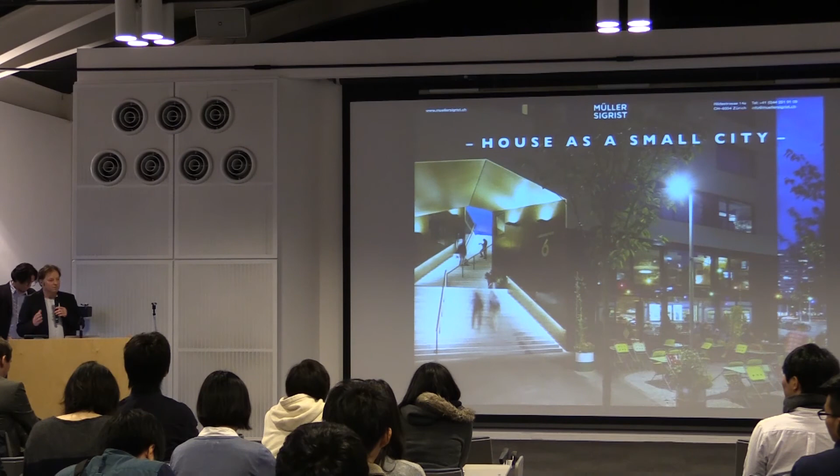Thank you very much for giving us the opportunity to present our work here in Kyoto. It's a bit special for us. I founded the office in 2001. I worked for Sigrist 3 years, and my partner, from ETH Zürich, worked at Herzog & de Meuron, and was also assistant for Kazuyo Sejima at ETH Zurich. Samuel Thoma joined the office from the beginning and became partner in 2006. It's kind of special because Peter Sigrist died last year, so we changed our office a bit, and this is also our first lecture together, me and Samuel, so it's also a test for us.

We would like to emphasize our built work to reflect our philosophy in the office, because we don't make architecture for architects. We think it's important that it's for the society. We reflect what it brings to the user. A building is not only for sleeping or working, it's also a gift to society, a reflection about people who use it or see it. This is not only for the architect or the critic, it's also about people who live in the city.

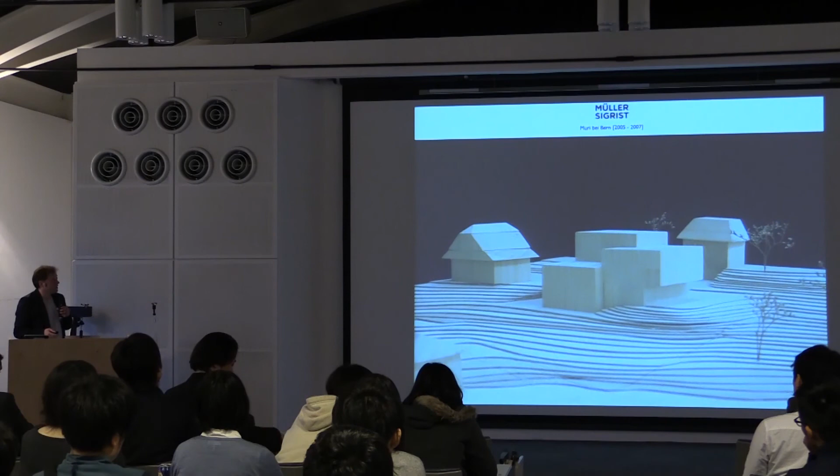First, a house for a private client in Switzerland, in Muri near Bern. A house which lies on a small slope, a compact house which turns in all directions. It's on a hillside, and it provides at the top a magnificent view. This is the entrance, the north entrance, so it's quite close.

The aim was to reinterpret villas from the 19th century, the town villas, providing a moderate higher density than the small single housing units in the neighborhood. The house includes an additional semi-detached apartment with 2 bedrooms. The main unit has 7 bedrooms.

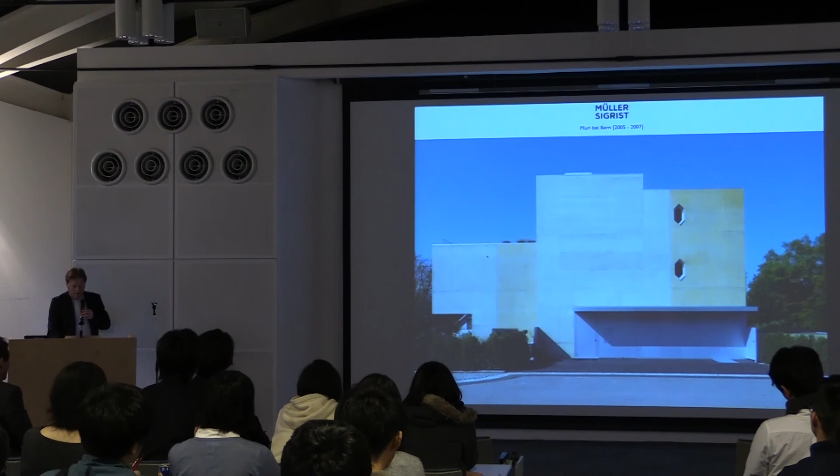Here the idea was also that as a house as a small city, it was about the way we designed how you walk through the whole house, inspired by a master of his time, Victor Horta. Even in very narrow spaces he achieved an interesting way of winding up, going up to the levels by accessing with staircases.

See also here in section, maybe it's a bit pale, but we tried to put in the middle of the house a vertical access to all the bedrooms.

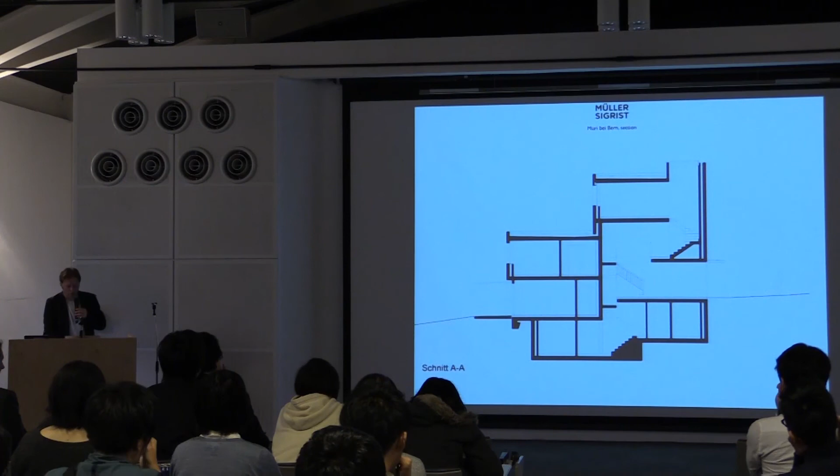Then the rooftop, second floor, where you can access the attic roof terrace.

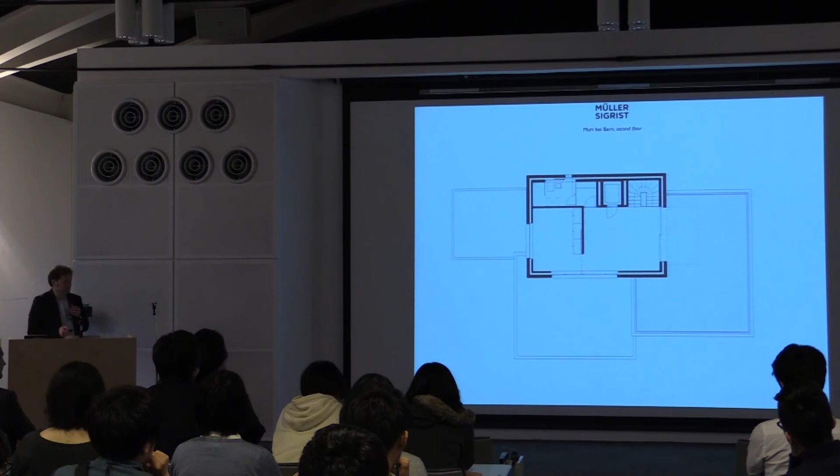Starting at the second floor, you also see a very simple design - the floor and the staircase are made in oak wood, and all the walls are white with plaster.

Then winding to the top, you walk around the house, go up towards the light, and finally reach the terrace.

There is also a covered sitting place on the ground floor. The facade is concrete, with insulation on the inside since we have to insulate our houses very much in Switzerland. The concrete was finished with a kind of paint, a pigmented lasur in two colors, so it wasn't just a solid block but had more attitude, bringing diversity into the concrete facade.

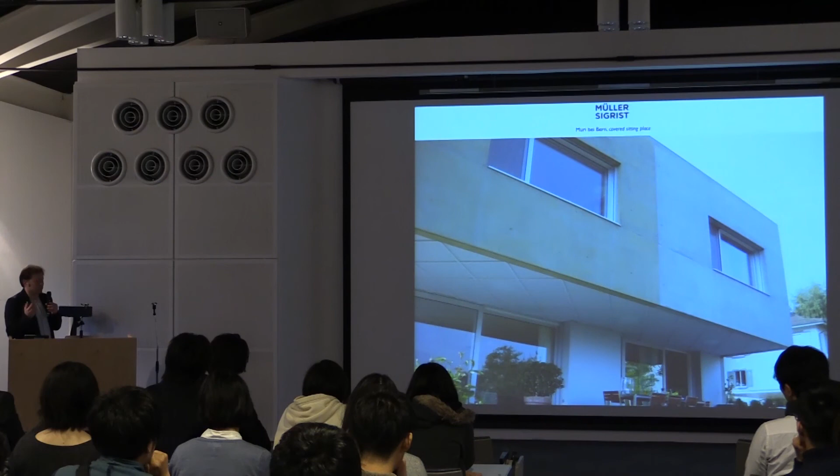Another point is the city as hybrid, which we've been fascinated with since our studies at the ETH. We worked on how to bring together different functions and uses in one building, not like this image here, which is a built prototype planned in the 40s. The idea is not to have separate forms or functions stuck to each other, but to bring them into a new unity, so something new emerges.

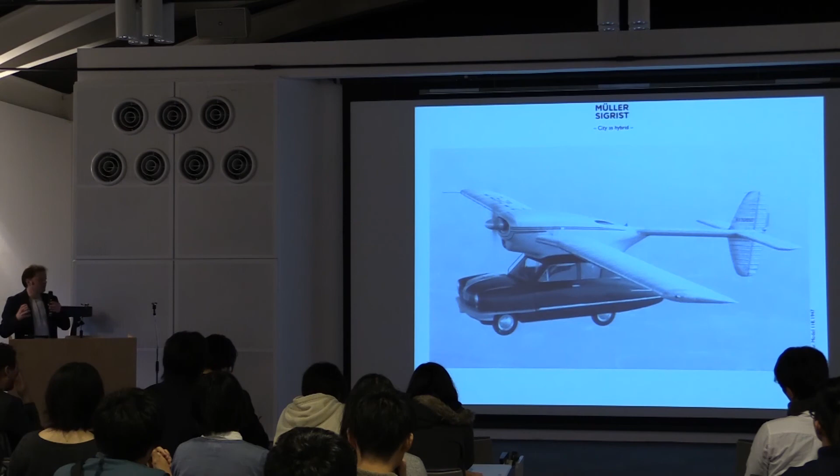We started this in a competition for Winterthur, which we didn't win. You see here all the studies of how we tried to achieve a big complex with shopping mall, hotel, and housing, and how we could bring this together so it starts to get a new form that brings a new unity.

Here's also a nice example, an old topic already almost 90 or 100 years ago. Henri Sauvage in Paris, maybe you know this, where all the different functions are really melted together, with the swimming pool almost on the ground floor, and then the dwellings going up above.

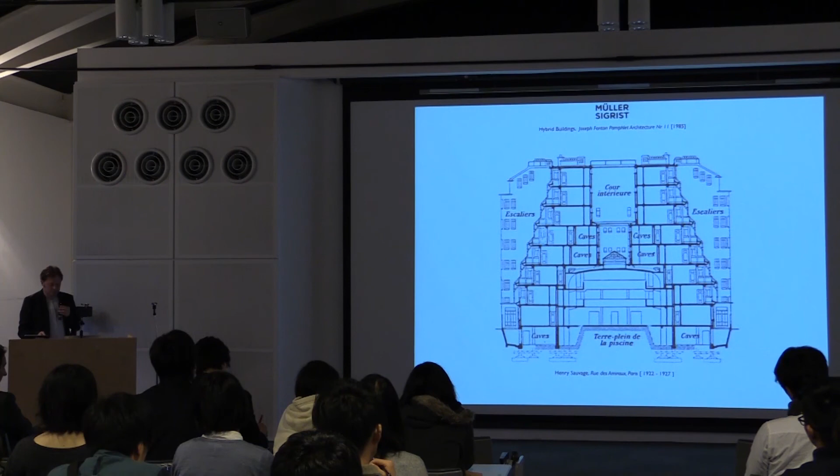So we have some types now which are under construction, or which we won, that follow this kind of typology or thinking, how to bring different uses together into a new form.

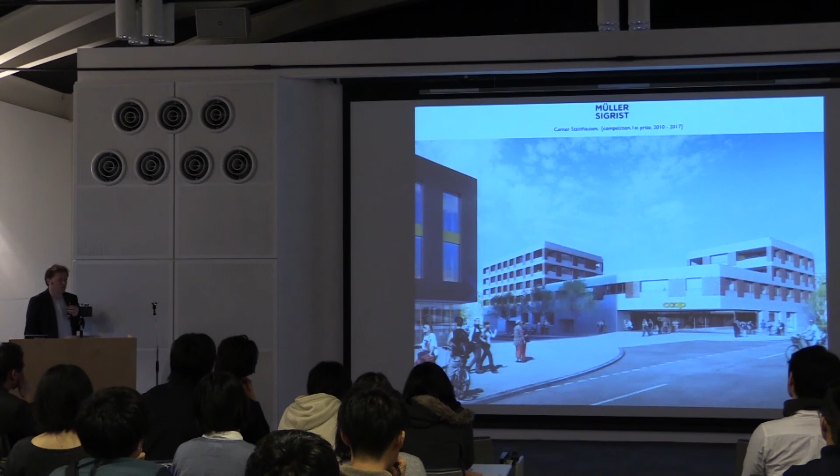Here, a shopping mall, a commercial center, which on top has 30 apartments for elderly people, and on the left side, also integrated, is the function hall and a public library, for a small village near Zurich, about half an hour outside the city.

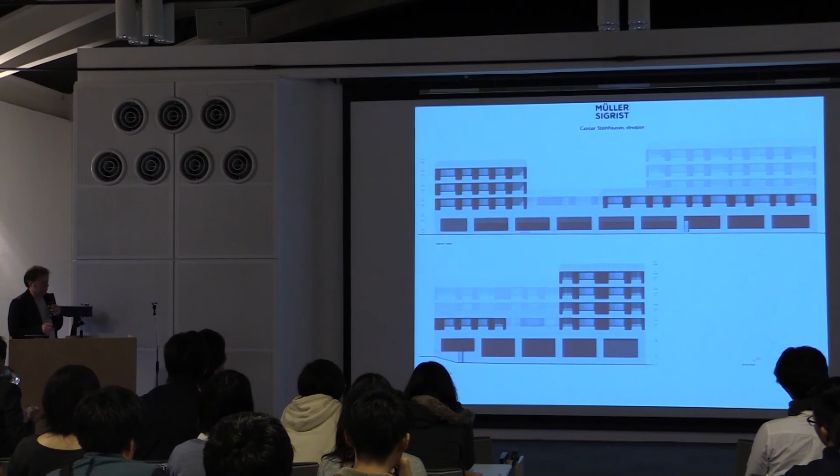The facade is planned as a combination of prefabricated concrete and bricks in between, so that it gets this unity and solidity.

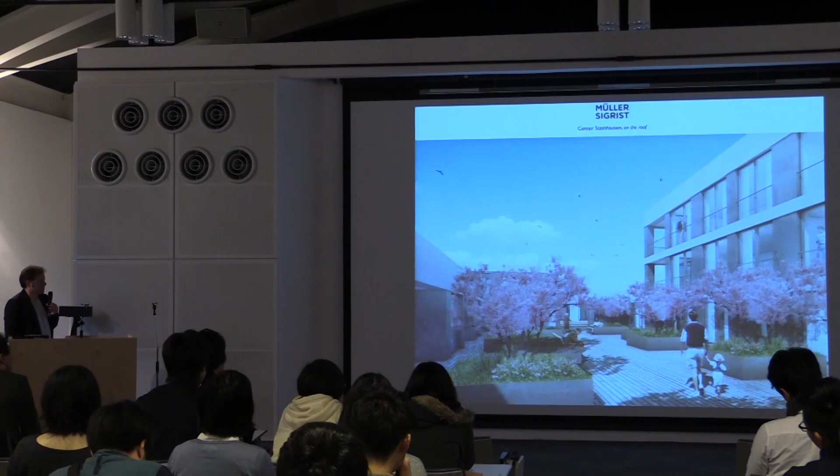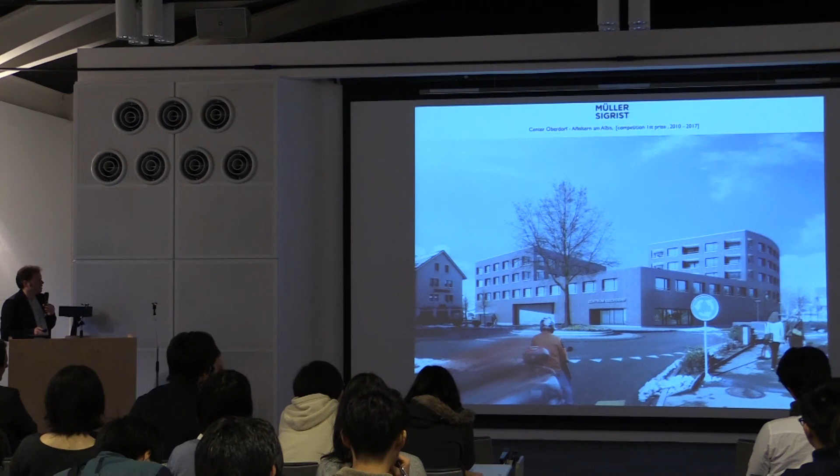Another type I'll show shortly is another commercial center with offices and 32 apartments on top, which follows the same typology. You see the unity develop as it goes up with the dwellings.

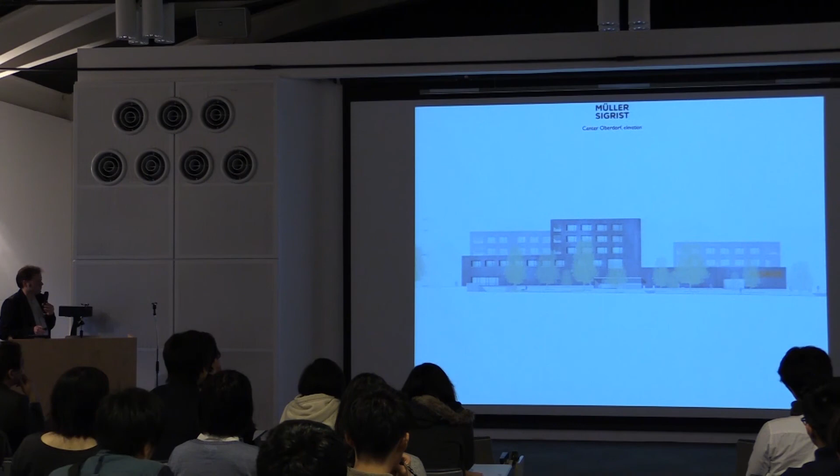So also here the facade was planned in brick, and construction is starting in 2 or 3 months.

Here we also had the task of bringing together an old commercial center on the left side with a new one on the right side. In this competition, we made a kind of covered mall passage, connecting them with a new steel structure roof, shown here in a visualization—though unfortunately we didn't win. All our projects come from competitions.

We never have direct clients or clients who give us direct tasks; it's really always by competition. And this one here, the extension with the new roof, we didn't win because the client said it was too nice, it would distract people from shopping.

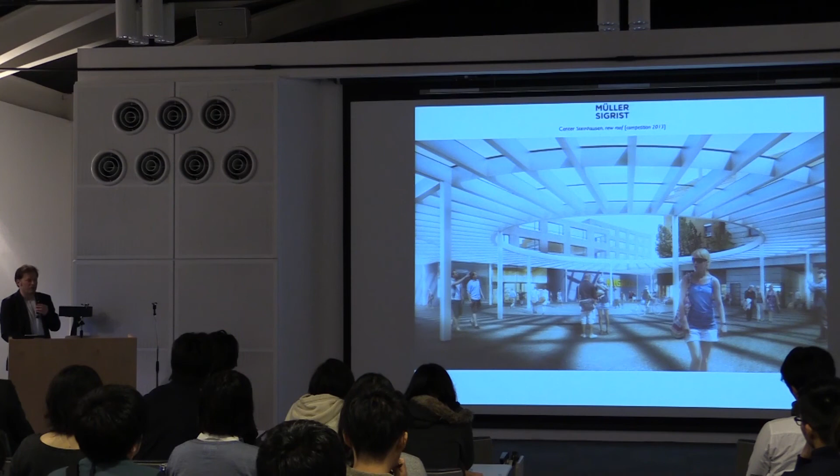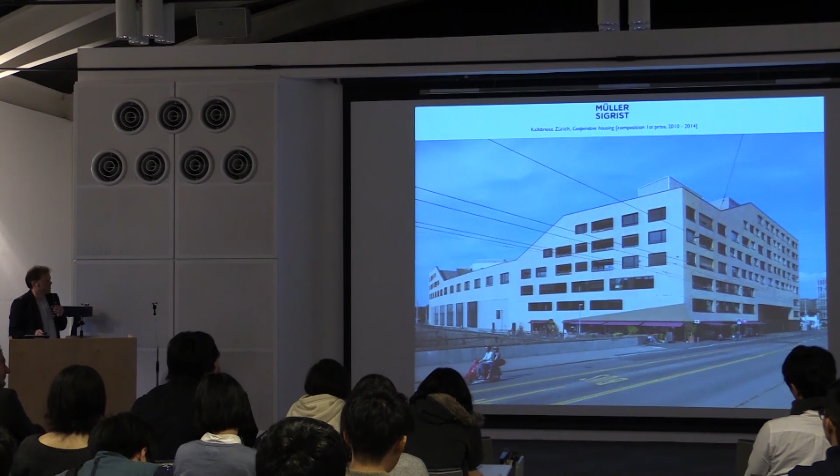This then is the bigger house, the Kalkbreite in Zurich, which was just finished - also a competition which we won. It was a public, open competition with over 150 architecture offices wanting to join, and then 60 or 70 handed in.

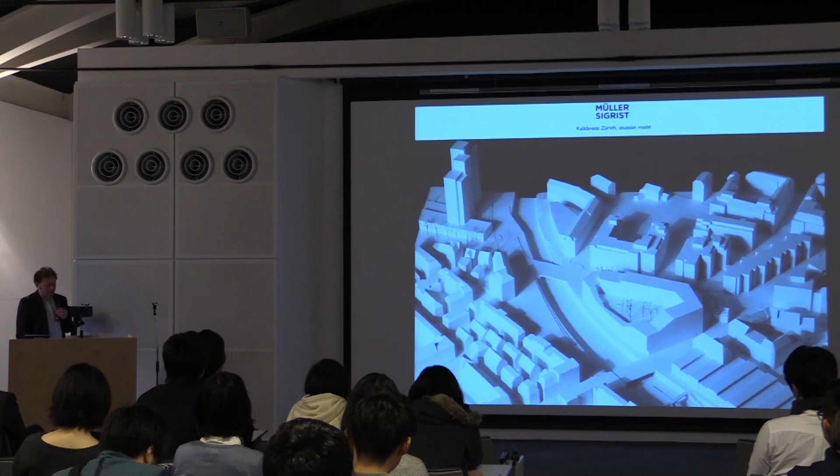Here it was really about the goal, together with the city and the client, which is a cooperative - a cooperative housing complex with 40% commercial spaces. The goal was to give something back to the city, because this whole triangular area was used for parking trams outdoors. There was only a fence, and in the middle of the city it was not very well used land, which the community or neighborhood wanted to use, because it was dark at night and not very friendly for the area. The project combines business and housing, and covers and encloses a new tramway depot.

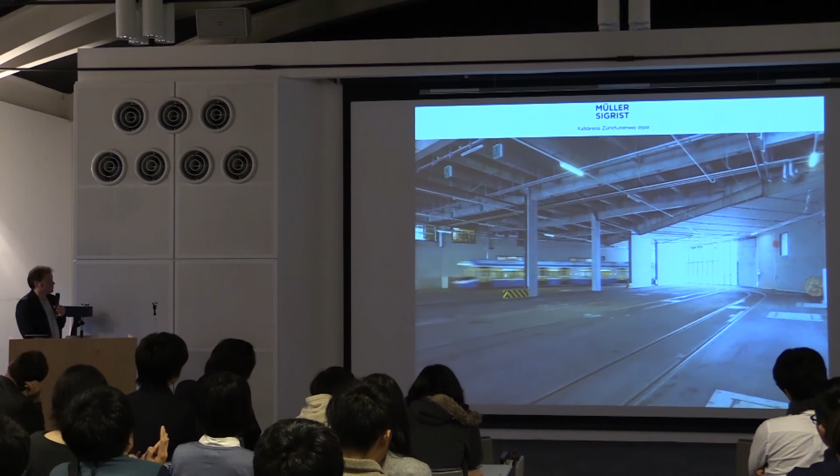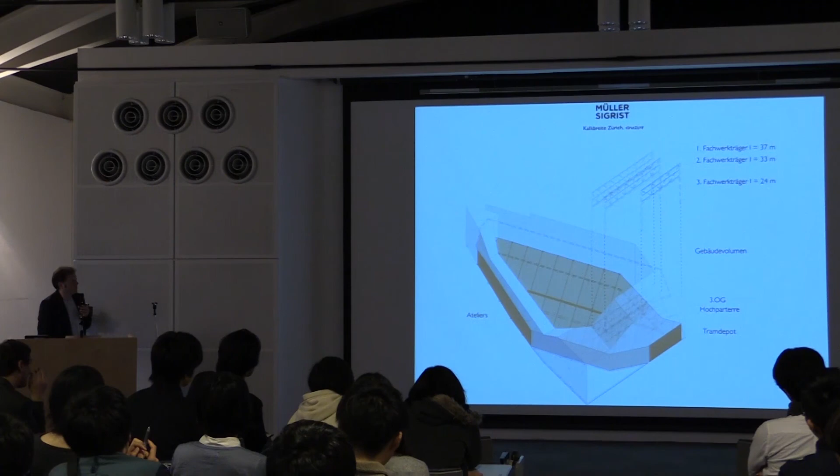Inside the tramway depot, you see the combination of the triangular plot plus the geometry of the rails and the housing made it quite complex. So we had to span here not only a typology, or the house as a hybrid, but really a hybrid construction - we had to use steel, a bridge construction in steel, to span over the exit of the tramway depot. You see here the construction site.

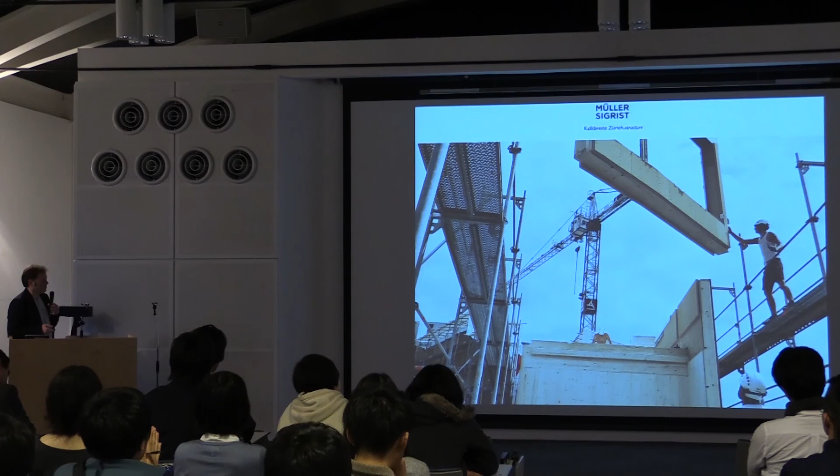As I mentioned, the construction - you don't see it from outside, but it's a hybrid construction. I showed you the steel construction for the bridge, and the other is prefabricated column, and there's also a part that is only constructed in wood. The whole facade is prefabricated wood elements with windows made in the factory, brought by trucks, and then attached to the floors. This was also a way to reduce building time.

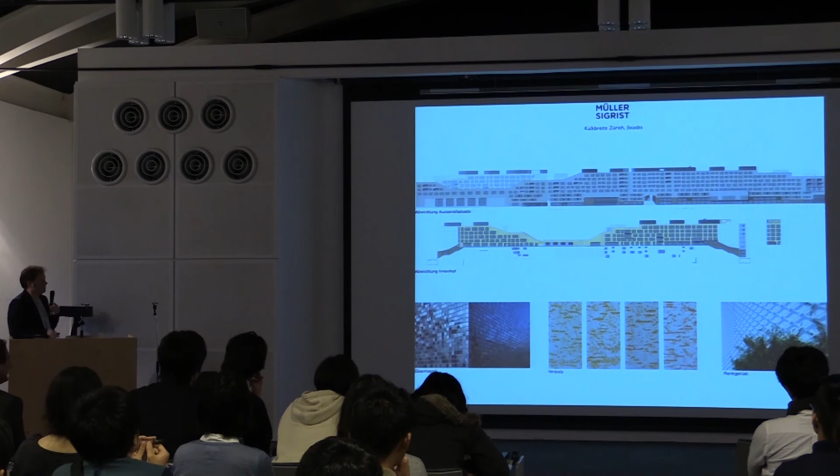You see here the material of the facade. It's an envelope, a folding out of the facade - the outer facade, the street facade, with a socle, a base which is more solid with glass tiles, and the upper part is plaster. In the interior it's only plaster, and you see also the change of scale from the outside's 8 stories to inside, where the courtyard has 3 to 5 stories.

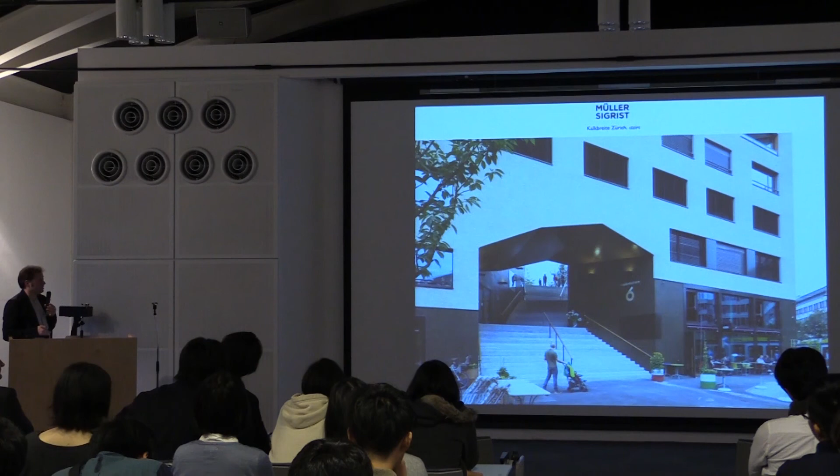So you arrive here, the public stair going up, and then the interior view of the courtyard, the public courtyard, which is the core actually of this housing complex.

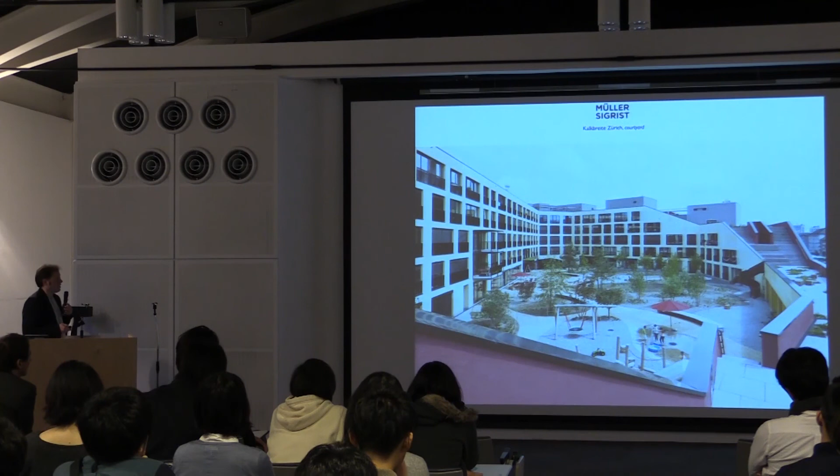So then also the client wanted to have more. The cooperative wanted to really try to establish different housing forms. So we had to achieve from small units, really small units, which are only 25 to 30 square meters, which are on top, so they're all in the same scale.

We have 97 units, which range from 17 square meters, the smallest room, up to 250 square meters, an 8-bedroom on the bottom.

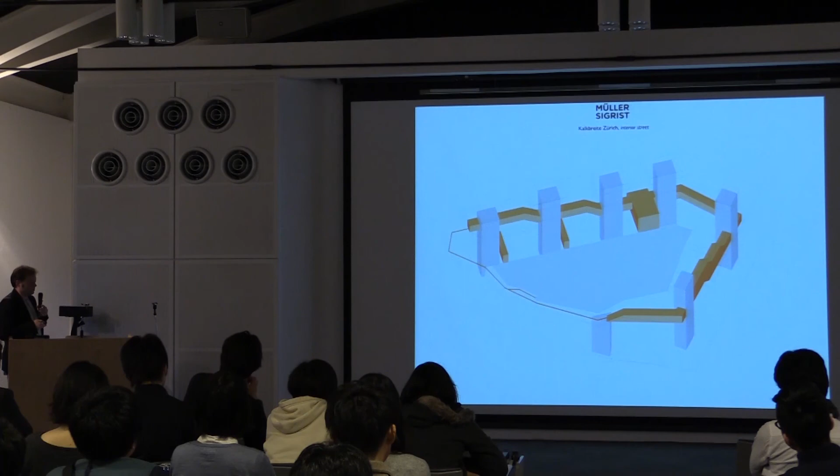They're organized around 7 vertical cores with stairway and elevators, but we also introduced this interior street, shown in orange, which was the idea to connect all the housing apartments with the collective units in the house. It's kind of an interior street which connects all the public uses which they can use.

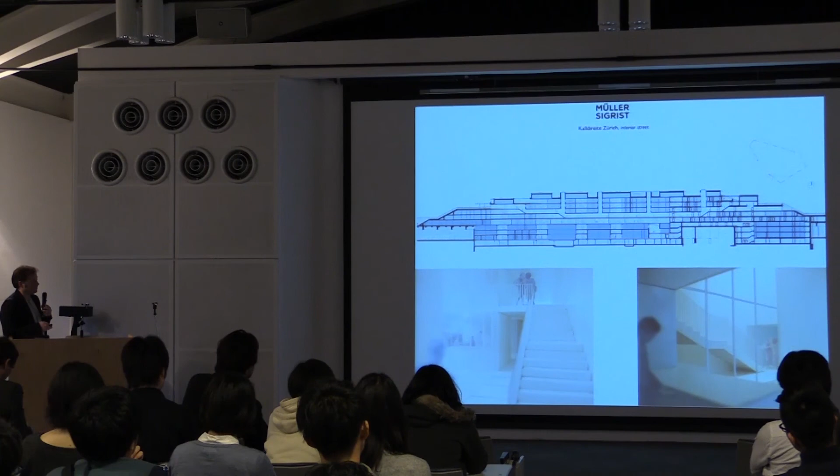This then in the plan, where you see this interior street, you have the foyer, you come up and can walk both ways through the whole house, to the house dwelling, and always take another stair here going up to the next level. This is the view of the lobby.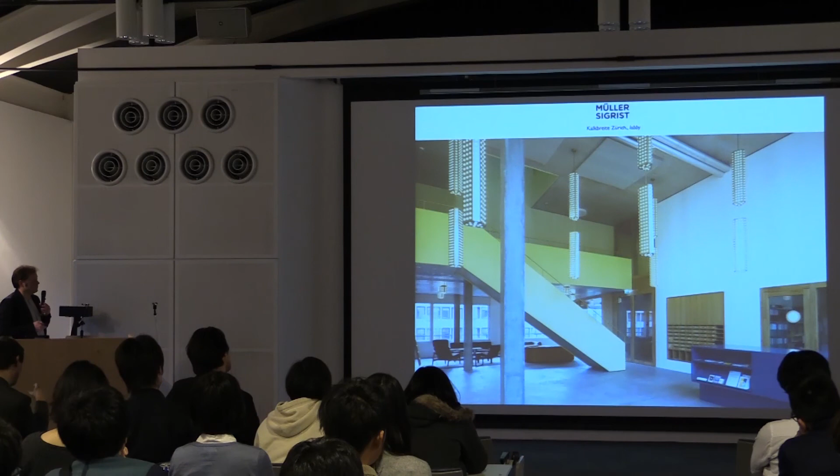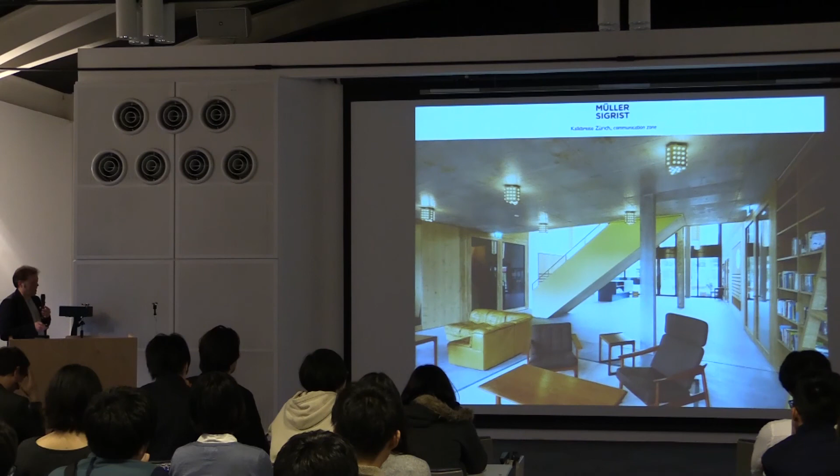Also here with a waiting area. On the left side there would be the laundry for making your washes, clean your clothes. You can wait here, and then it was also the idea to have a public library where you can bring back your books which you've read and don't need anymore. So it's also about sharing all the things which you can share for all the inhabitants, to reduce your own private space.

The view of the interior street.

Then here also you see our contribution, that we didn't want to have the small units kind of like in a hotel. We wanted to bring them together in groups. We call them clusters. So always 10 small rooms, single rooms, but they have one big common extra room, which is this one, which has a balcony.

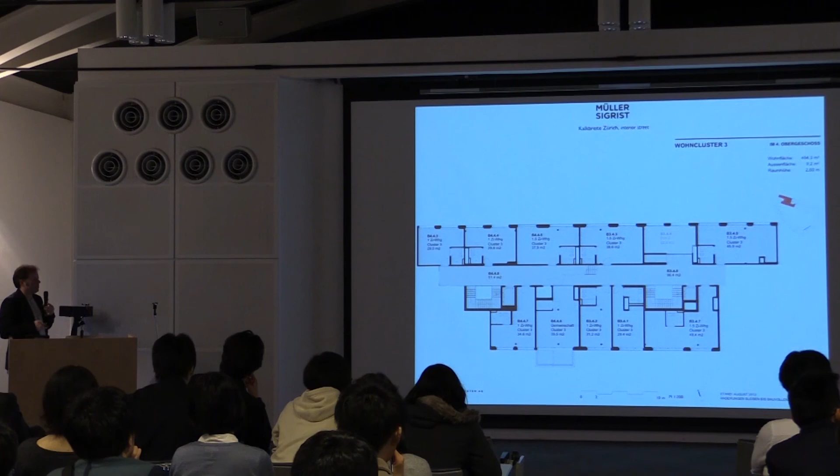So here you can welcome your guests, or these 10 apartments together can come together here and cook together or be together in the evening. You see them here also. This always has double height spaces that bring light into the interior street.

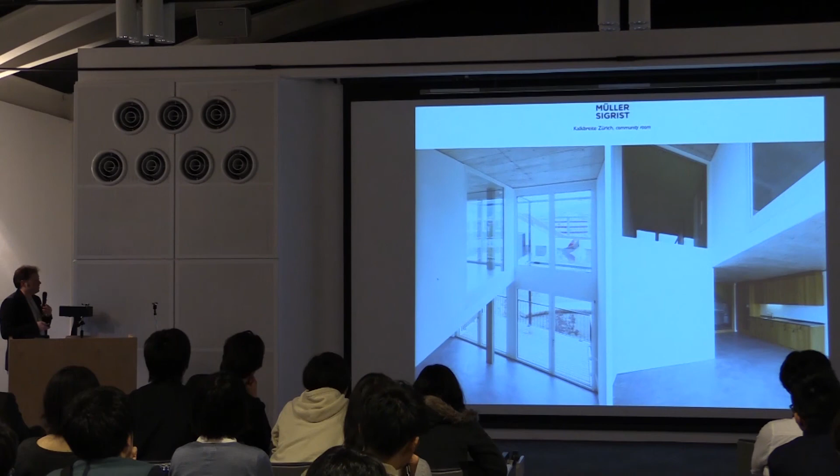At the end, you can exit to the rooftop, to the terrace, and use the terrace. There is an exterior stair, a cascade of stairs coming back down to the courtyard. So you really can walk around the whole house and come over the rooftops back, and all the roofs then.

The other apartments, except these cluster rooms, don't have private balconies. The balconies are together. It's also a collective exterior living where you can barbecue outside together with all the inhabitants, or have plants here which you can use and share.

So in this way, this project was also to do a house in the middle of the city which works like a city complex, where you work and sleep and are together with all your inhabitants, where the trams sleep downstairs. So I give the microphone now to someone for the next project.

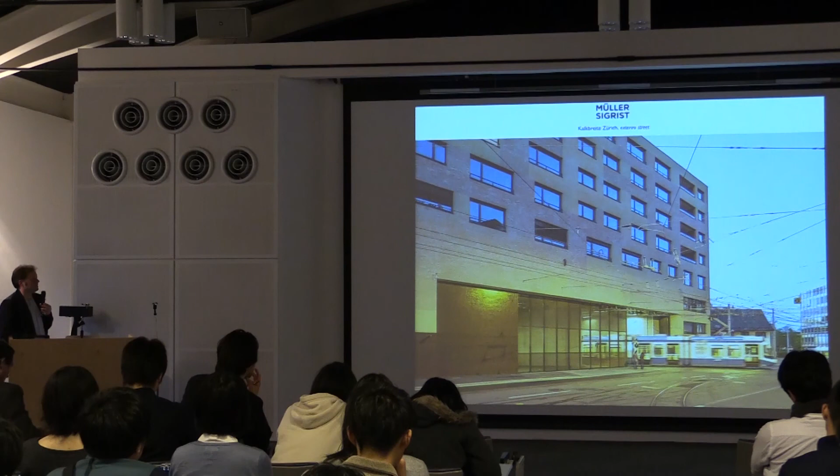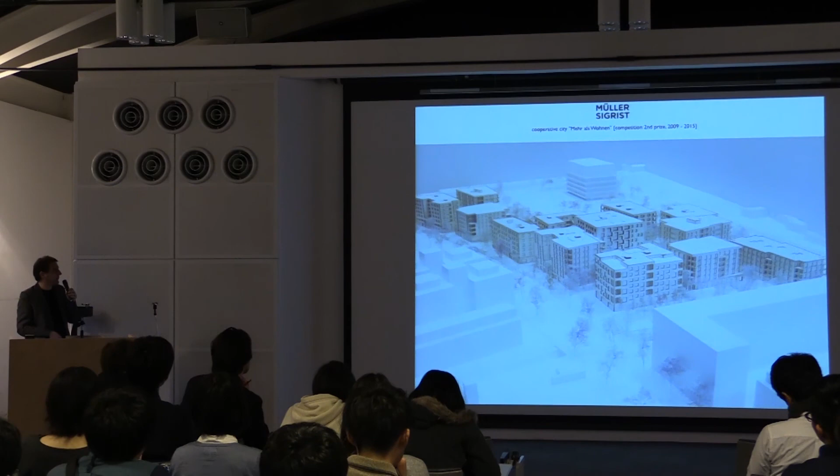I will just continue with another housing project. We have some similarities with the one we just saw, but it's not in the center of the city Zurich. It's more in the north, where there is a lot of need for growth. That's also the background.

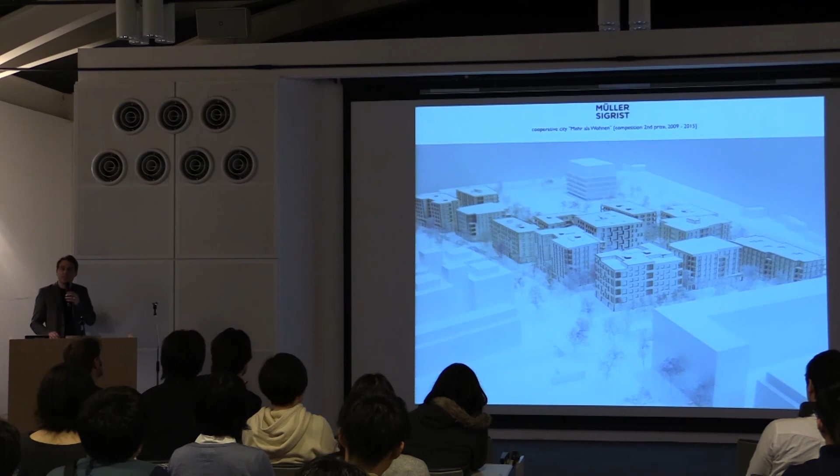We have several cooperative commissions, because of that growth, and these cooperative people redo the houses from after the war, and so this combination led to the result that we have several such projects.

In that one especially, it's really a kind of piece of city. As you can see, it's quite a dense project, how the buildings stand to each other.

And the other special thing was also that it was divided into 5 offices, so we had to do a cooperation also with other architects.

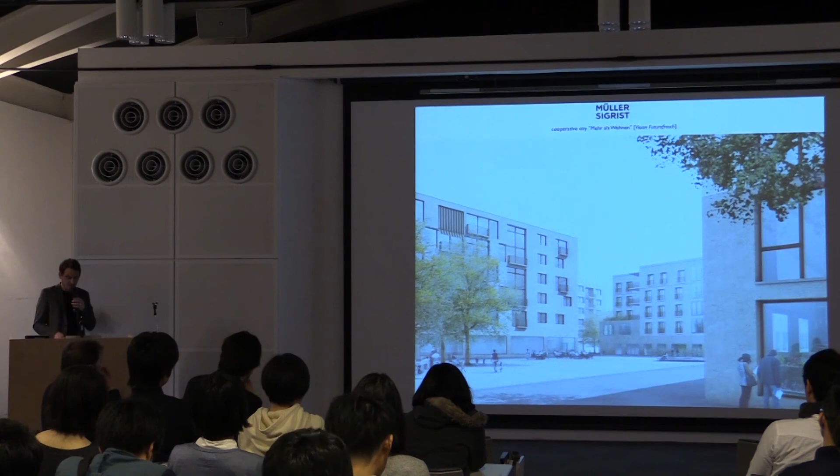In that one image visualization, you see the main square. One issue is that if buildings stand close to each other, we want to introduce some public spaces. Out of the idea competition, which you see a bit on top, there were different issues, like how to use roof gardens, or which spaces could be common spaces to share.

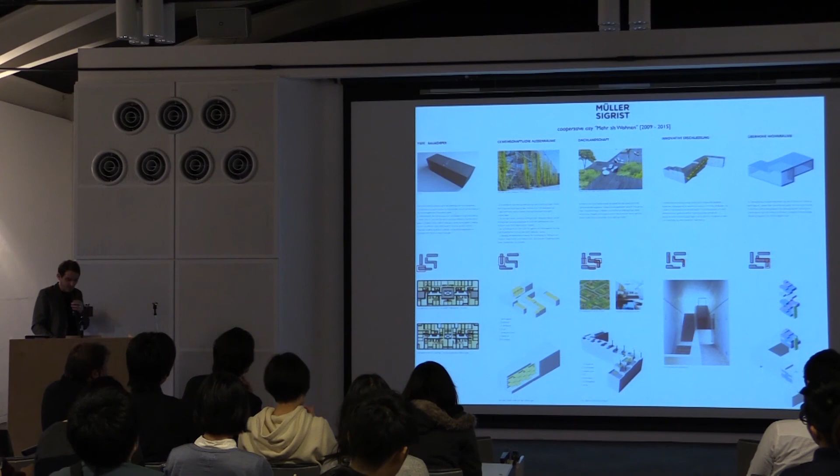Out of that we developed various topics for each house. Basically all the offices had their own typologies for each house, so that you don't just copy several buildings, but there's a kind of complexity and several architectural topics.

In that one, house D, you see maybe in the right down, this one has almost double height living rooms, which we could introduce, and which you normally don't get in every cooperative housing project - such a generous space.

That was also then in the visualization. You see on the left the corridor, which has a normal room height, and then you approach the living room and have this overhead space.

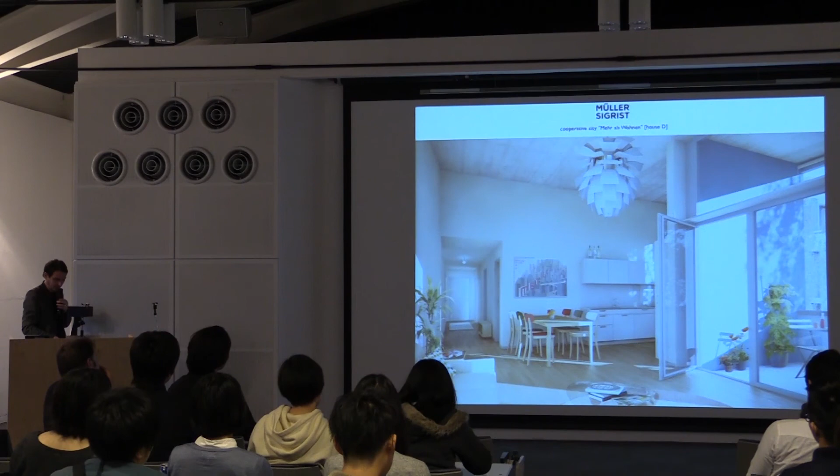Another issue was that all the facades are different, and we had to find ways to work and make a lot of models, to see how these buildings come together, how they stand beside each other, and how it works with the colors, of course.

In that one, for example, we had to play with - as you see - two depths of the plaster facade, and also the proportions of the window are changing.

And in house H, you see the other issue, that it's a very deep building block. So we had to put the staircases in the center, and surrounding that, the bathrooms and wardrobes.

And then in the middle you see there are some types which go all the way through, so you can experience the whole depth of the house - meaning you have this long living room with the loggia, then walking back into a bit darker area, and on the other side are the bedrooms.

That's now the stage of nearly being finished. That's a typical situation with the loggia and the always-open kitchen, living room situation.

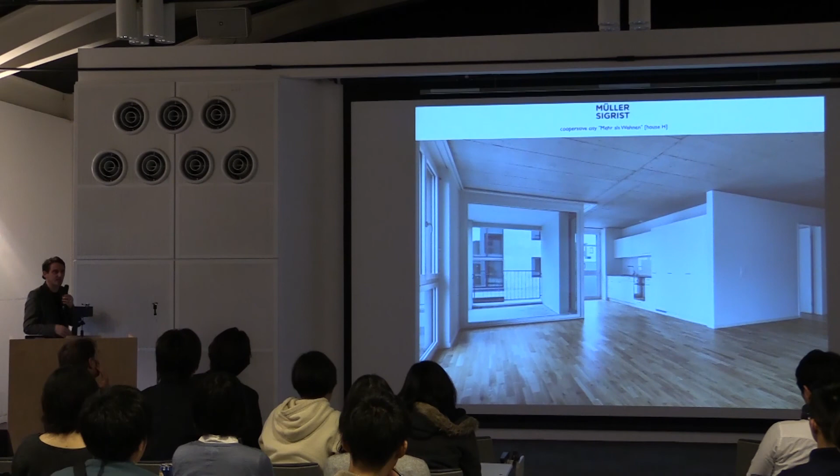To mention, this was also one of the projects with a general contractor. So besides the one we saw before, in some of the details we don't have the same influence as if we do it in a traditional way normally. That means in some details we have to go back a bit.

Then in house E we had another topic - this so-called vertical garden, where on the balcony there's always a pot done in concrete on the side, with a water access. The idea is that later, as you see in the visualization, this garden grows and covers basically the whole facade, giving you this kind of little cosmos of plants on the facade.

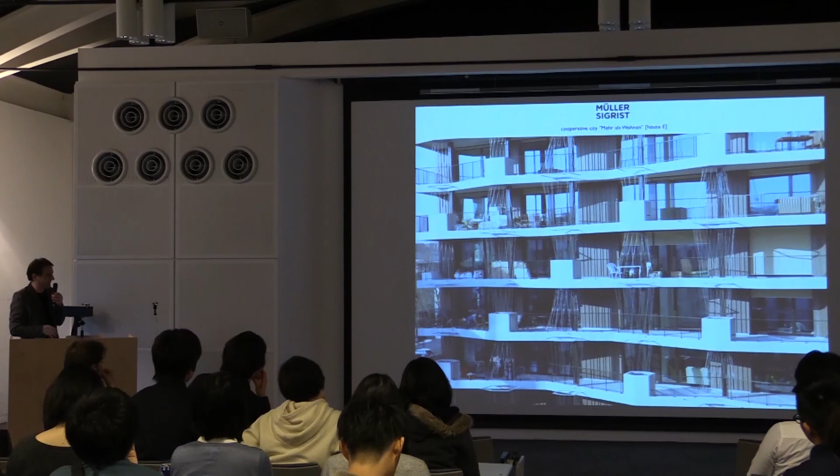That's another view of the state of the building site. It's just being done now - this metallic net which connects each floor and which will be the ground for the plants to grow.

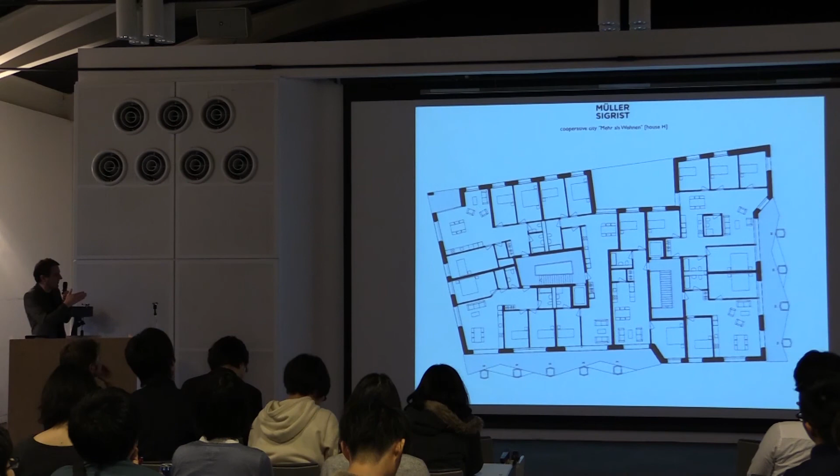And that's another floor plan. Maybe you see on the right side how it works with this balcony, and it's nice that you have access from almost all the rooms directly to the balcony.

That's another project we finished in 2012. It's also cooperative, 130 dwellings, again in the north of Zurich. Here the concept was that there was a quite noisy street, so we did one long building in front which helps this situation, and then in the back are these freestanding houses oriented on four sides.

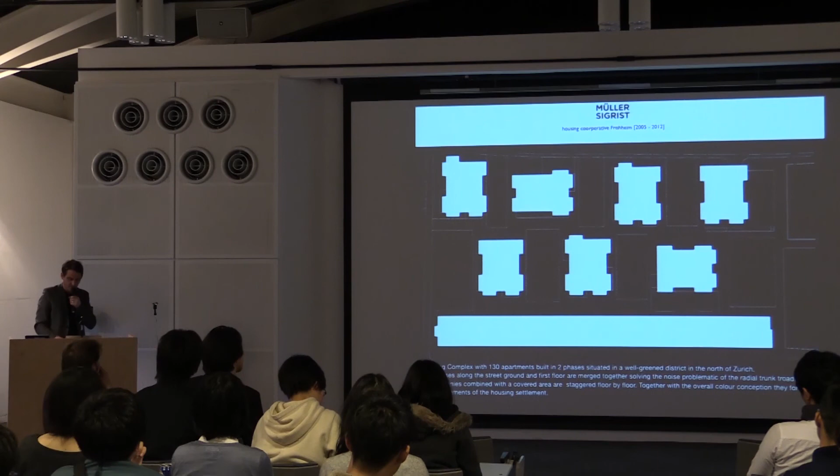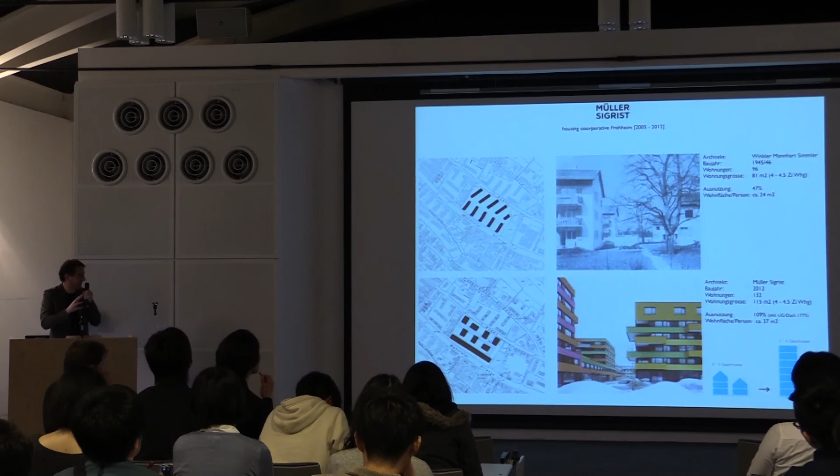That's what I mentioned in the beginning - a comparison of how to rise the density. On top you see the existing housing on the plot, which was from the 40s, around 1946, built with low density. These were typical 3-story houses with a lot of generous garden spaces in between. And below you see our proposal, with this blue scheme showing the rise of density, compared in this section situation.

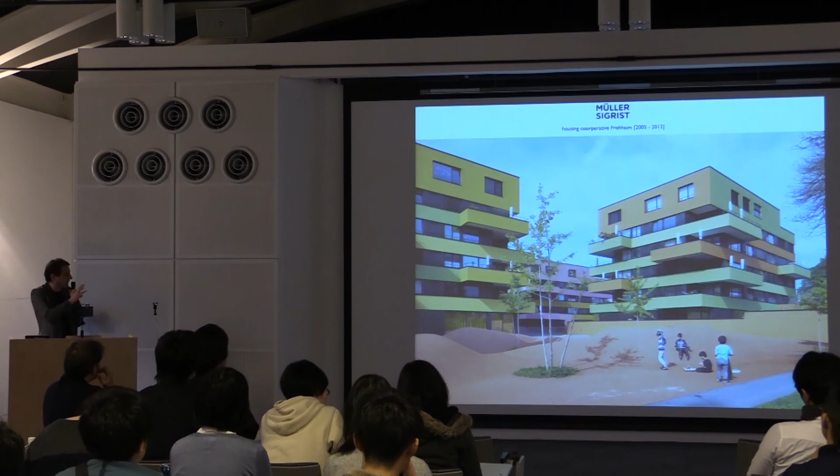That was one of these outside spaces, which is really used now by kids. We used a kind of rubber-based surface, like you know from tennis courts, and modeled this outside space so it's really a nice playground.

Then you see the two typologies. On the left is the building on the street, which has the core bathrooms in the middle, and then towards the noisy side you have the living room and kitchen in an open space, while towards the quiet side you have all the bedrooms.

The freestanding house, as I said, always has these big balconies which you can access from the living room and eating area, and is oriented on all sides. Normally one flat has two sides of orientation.

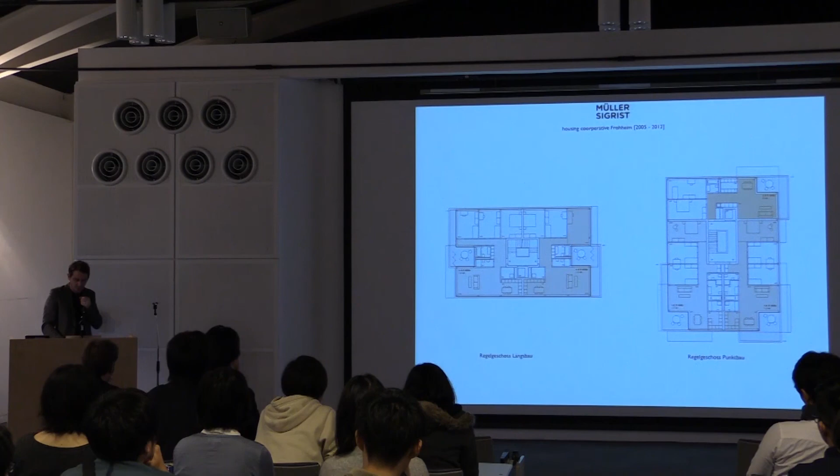This again is the final stage, where you also can see this play with the balconies that generates a kind of double space height when you stand on your balcony, and the next one comes not above you but like two stories above.

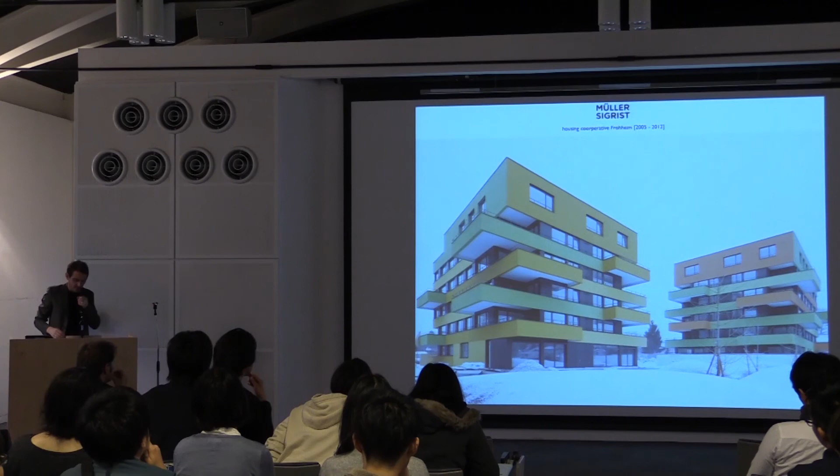Traditionally there's also a space which you can share and do little birthday parties and things like that. That was a room we created with this fireplace for a warmer kind of atmosphere, with specially fabricated tiles we made for this project.

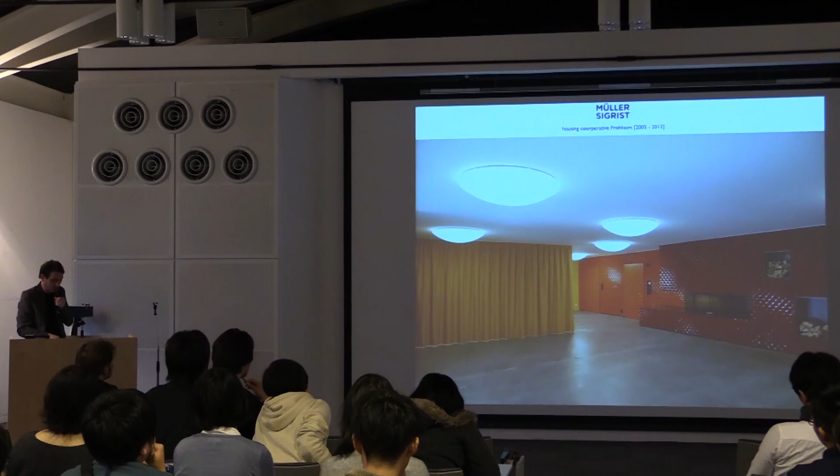Then this is a move to the city of Basel, where the office of Herzog & de Meuron is, as you might know. It's in Münchenstein, an area near Basel where this whole plot called Dreispitz is being transformed.

As a sample there you see it's at the campus of the arts. Our site is number 2, which is a refurbishment. Number 1 is more recent, a tower which belongs to the school we did.

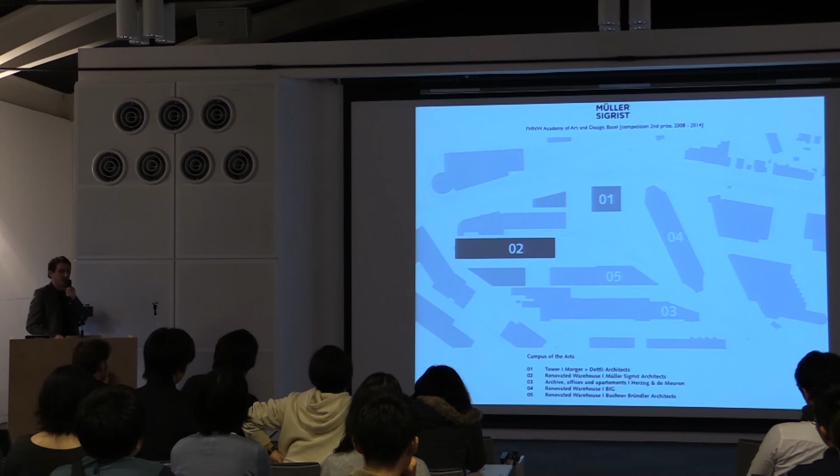And then you see various other projects. Number 3 is an archive, offices and apartments by Herzog & de Meuron, and other renovated warehouses, so there will also be space for artists, gallery space, and to kind of reactivate this area.

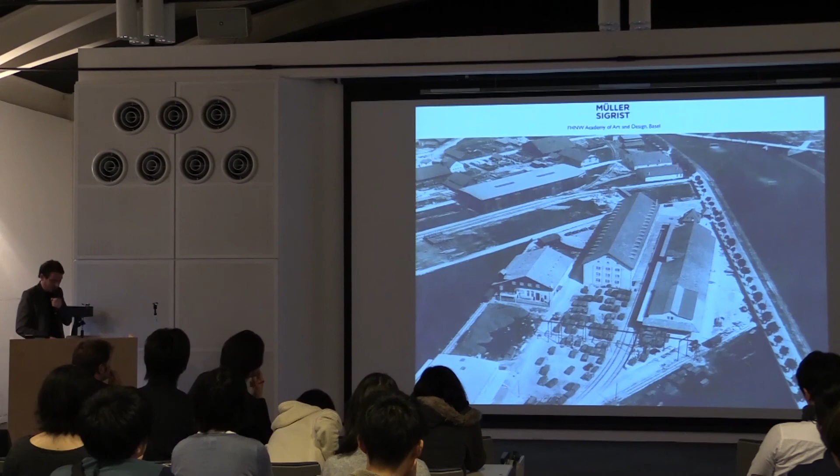This is a photo from the archives. Our building, they stored goods from the trade there, and as you can see, the situation was that you have the building, and then the ramps where the train could access to bring the goods.

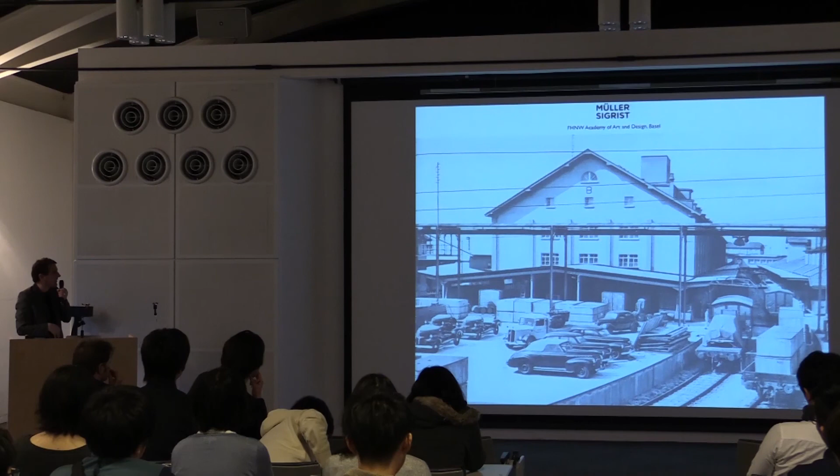Inside, we were fascinated by this kind of mushroom columns. It's really a nice structure - you can always see this shape, and it's a bit changing from floor to floor.

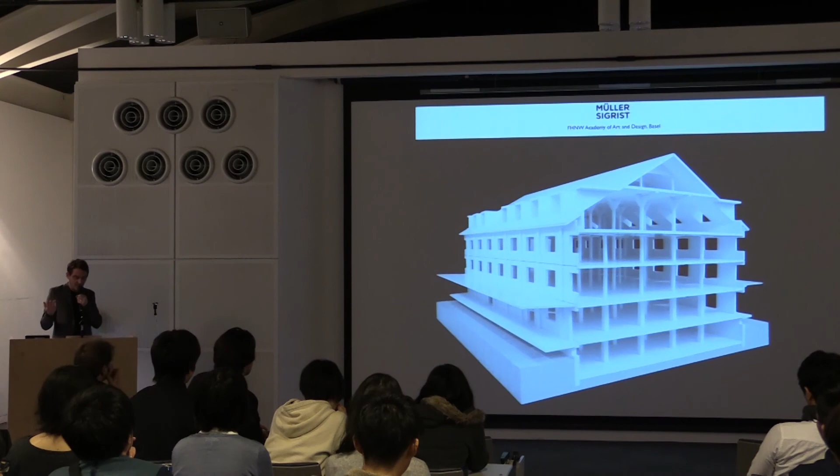That's basically how we found the building when we started working on it. We made a structure model to say, okay, for these art spaces - it's really an art school - we wanted to take out as many walls as possible, and then, as you see on the floor plan, make really generous spaces for the ateliers.

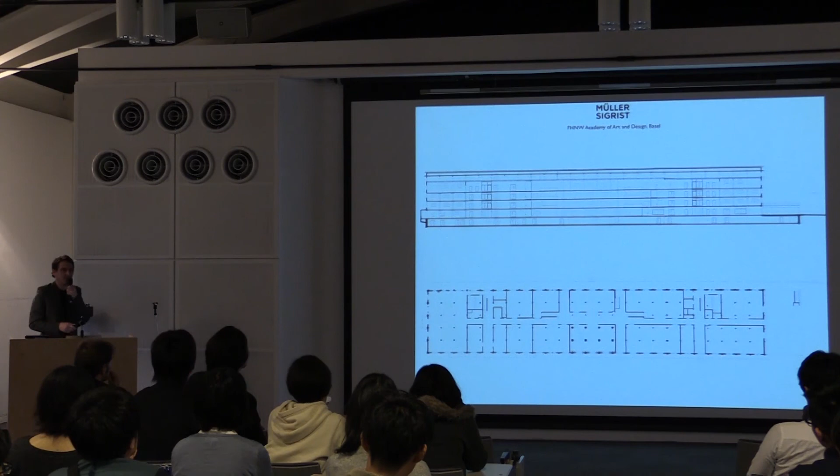That was also part of the intervention. We had to cut out some slabs during the construction, and to keep it able to hold all the weight, we had to do, with the engineer, such provisional interventions.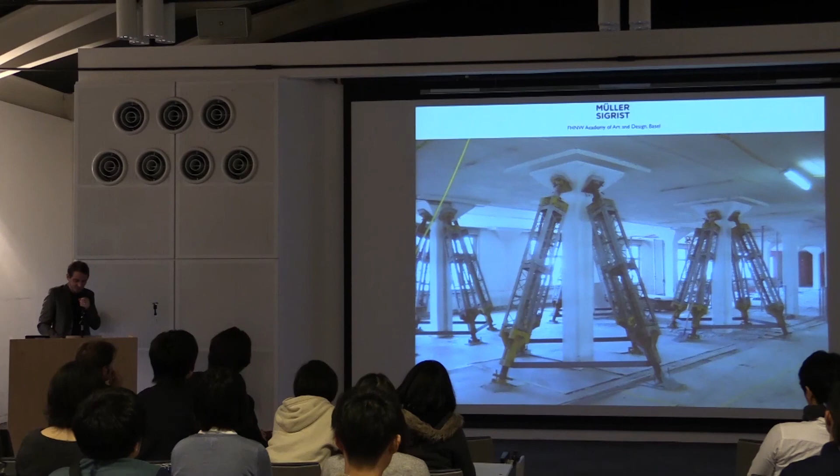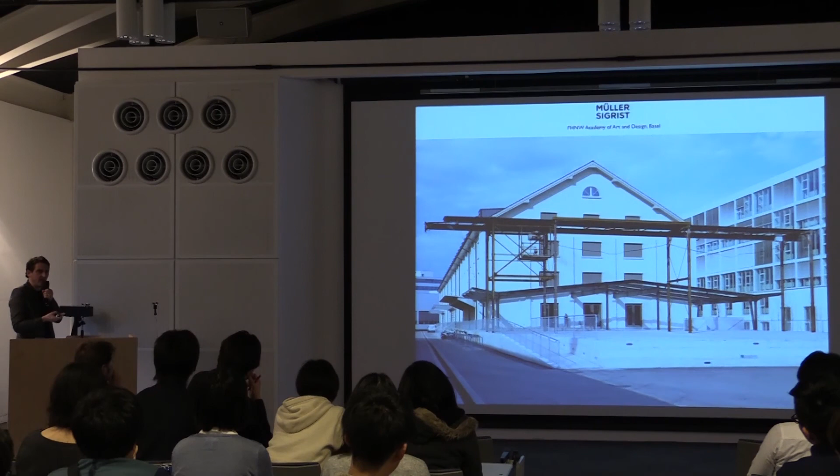From the outside we kept some elements which were still from the time before, and then in concrete we made this new so-called stage in front of the building, where students can meet in the summer, and there's also a little cafe. The idea was that when they come from a lecture or go back to their atelier, they have an outside space where they can meet.

Another element was this new staircase which I mentioned, and also the floors we kind of liked. There were several transformations and changes of use before our intervention, so we found a lot of different floor materials, and we wanted to keep that, so the students can still feel there are new elements which have been changed, but this kind of charm of the old materials you see in different elements, also like here in the flooring.

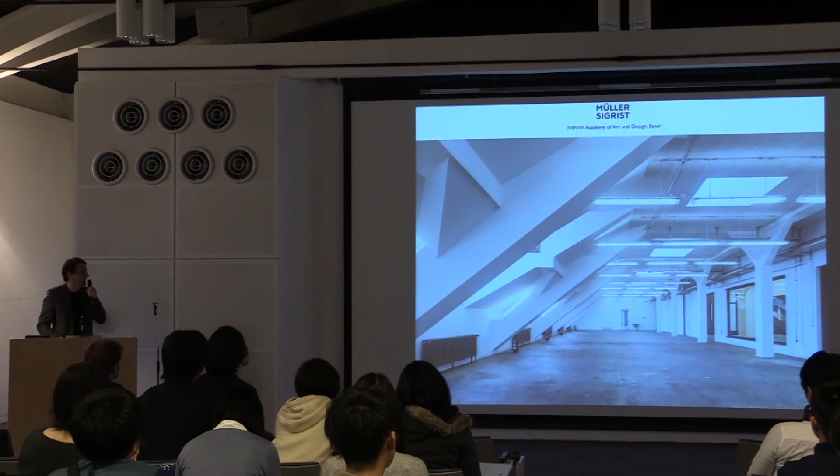Another view, then we can see some of the ateliers, always these two things I mentioned, the columns, which are very important, and then the floors. And then of course we had to introduce all the techniques like lighting and air conditioning, which is everything visible on the ceiling. As you go up, you're under this roof, which we had to cover because of fire protection reasons, but still you have an extra height because you're in this most upper part, like here.

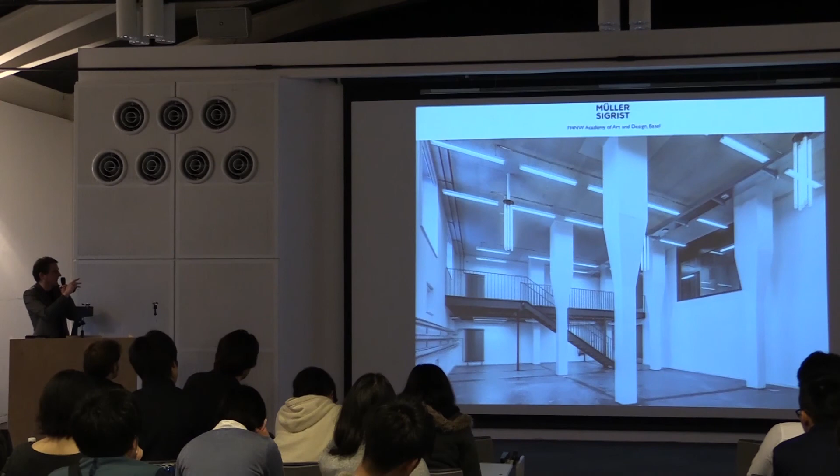And then there were two special situations. This one is for special meetings or celebrations in the school, where we cut out one slab to make this double height space, and we kind of adapted these columns as a theme. These 4 columns are new, made in concrete on site.

Also, since the building is very deep, we had the corridor and introduced many big windows, which give you a certain communication - you can see what the other department is doing, and see people you know. At the same time you can close it with curtains if it disturbs.

So that was kind of the situation. And then also, what we liked is now, one year later, you see the students and how they took over the space and really use it. That's also another thing Pascal mentioned - we don't do this only for ourselves to publish, but it's very nice when you see later that people actually like the architecture we did.

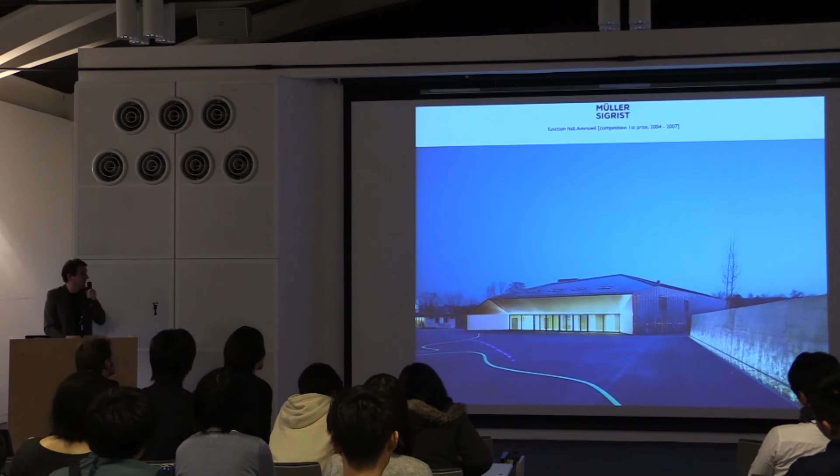And this is the final project to show. This was a function hall. It's in the east of Switzerland. I will come back to how the shape was developed.

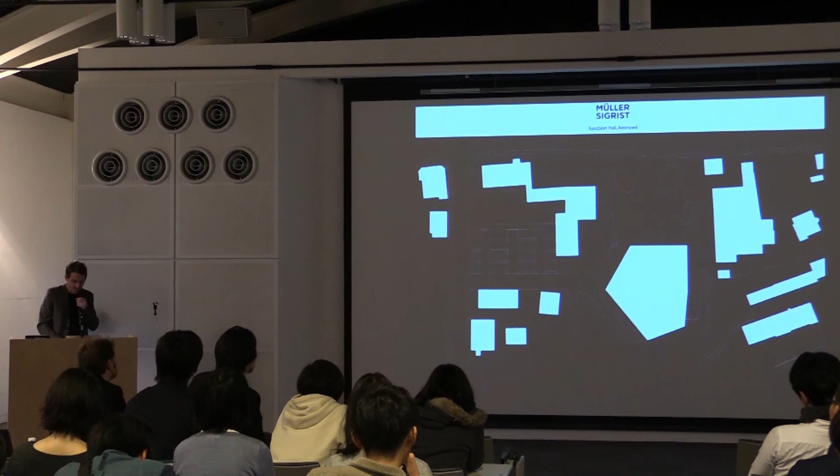It's important to know that in our proposal, compared to many others, we didn't put the building on the street, which would be here, but it's a bit setback, which generates a square to do things or markets. An issue was also the existing hall, which was actually quite nice, and it's really literally called a party hall, so people are meeting there and doing several kinds of parties in the village.

As a reference, what's important if we do such a party hall is that the people themselves must be the user and the center of the happening. The other reference was the tent, like a circus tent, which we thought could be interesting because this building is not like a box, or directed only at a stage for music, but it's really covering the event and the people.

That led to a variety of studies of the shape - how could it be transformed into a shape? And of course it has a certain sculptural aspect.

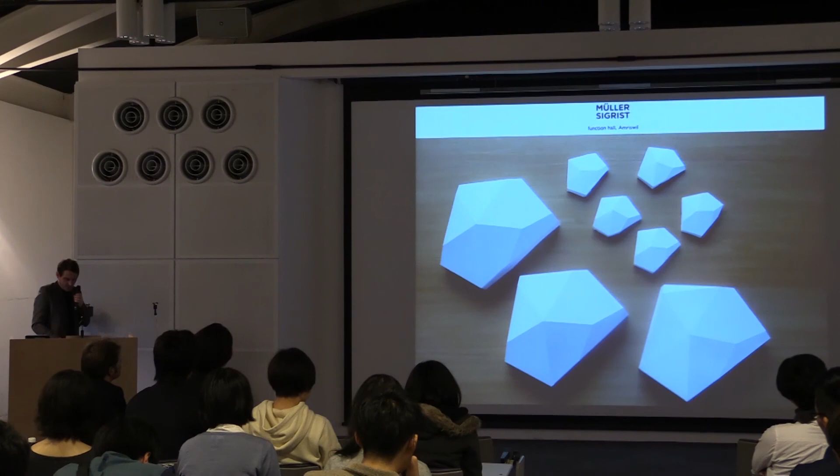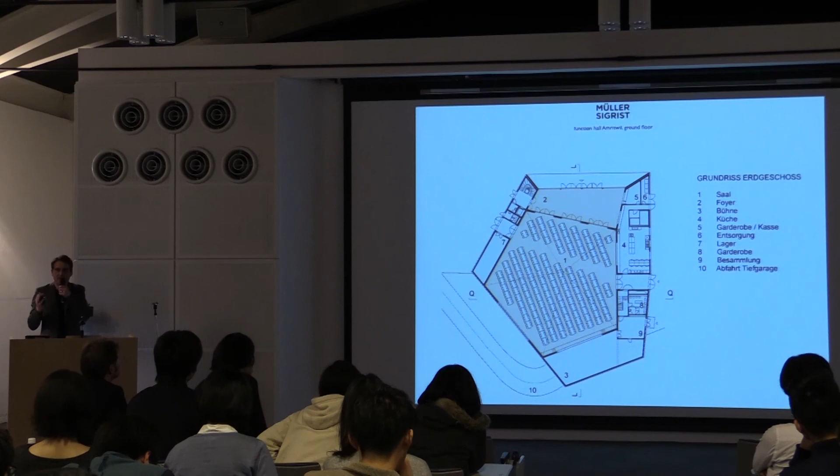Here you see quickly how the floor plan is built up. In the middle you have the main hall, which you enter through number 2, the foyer. Then you have a stage and a window which connects you to the exterior. On the side walls you have the side functions like a kitchen and toilets and so forth.

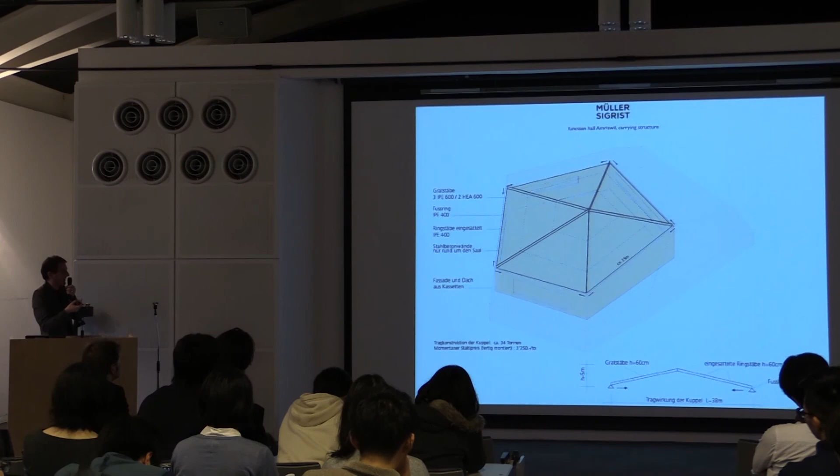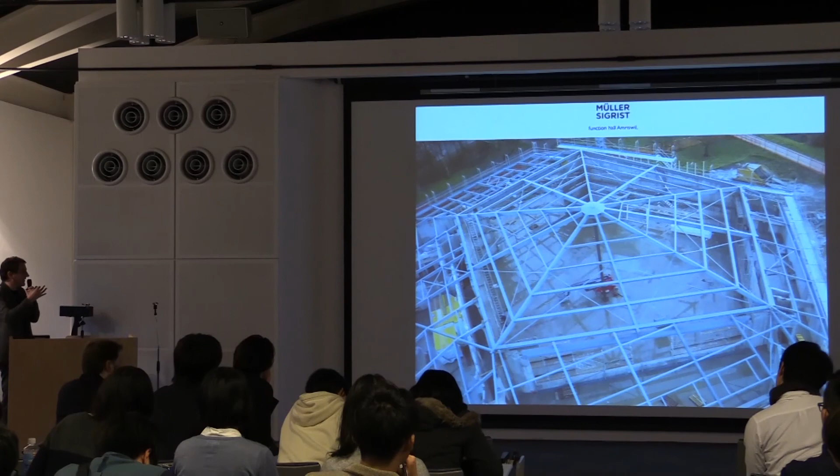Basically the construction concept, since the competition, stayed the same - the walls are made of concrete, and on top we planned a steel construction, like this. You see the concrete down below, and then built up in this kind of spider shape, the steel which meets then in the center.

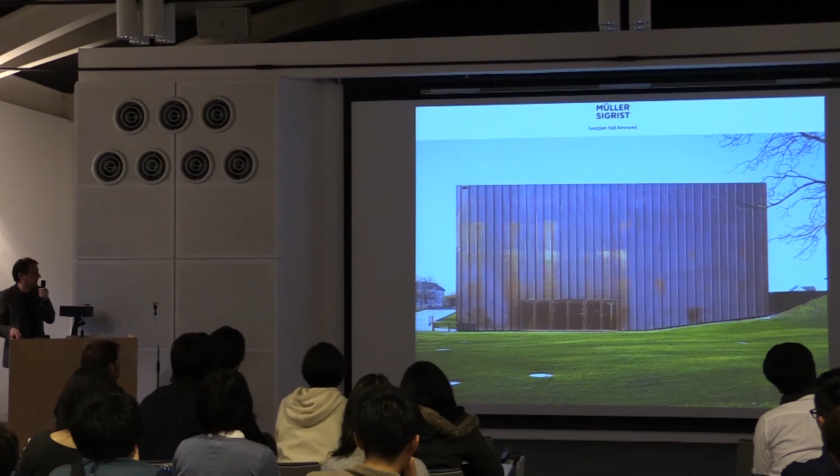Outwards, we thought since it's quite a countryside setting, we'd use copper, which is not a very expensive material - it's kind of common, and you know it from other buildings too. Of course it then transforms over time, the copper, so now it's much darker already. This is from the time right after it was completed; in the meantime the copper is changing.

Then you enter the building, and inside we used quite strong colors and developed a skin which is behind this - the materials for the acoustics, since you of course need good acoustics for these spaces.